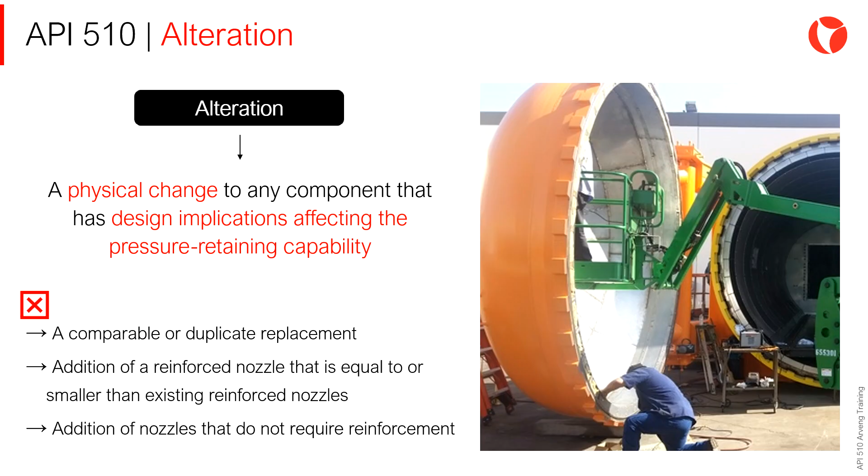What should not be considered alterations? Any comparable or duplicate replacement. For example, if I replace a 4-inch nozzle on a vessel with another identical 4-inch nozzle because it needs to be replaced, this is not considered an alteration. Also, the addition of any reinforced nozzle equal to or smaller than existing reinforced nozzles, and the addition of nozzles that do not require reinforcement.

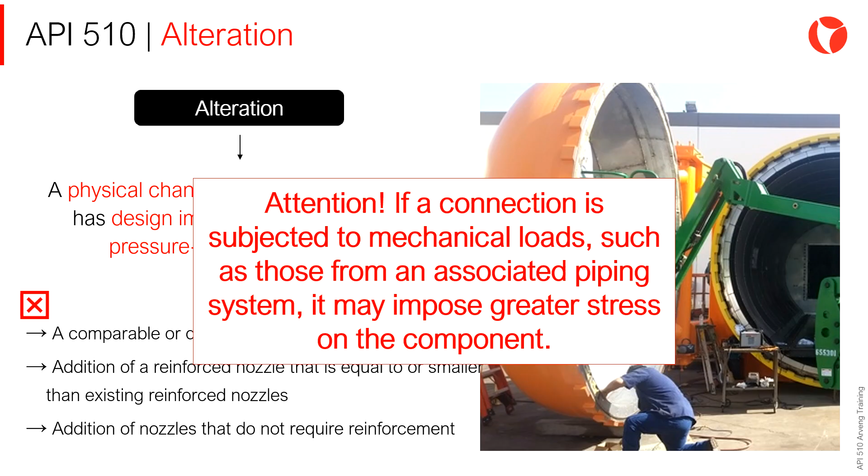It's very important to take mechanical loads into account. If a connection has mechanical loads applied, such as those from an associated piping system, it may impose greater stress. We know that if we connect a pipe to the nozzle of the equipment, that pipe will tend to move due to thermal effects. When the pipe shifts, it generates a series of moments and loads on the nozzle that induce stresses in the vessel, which can complicate alterations by changing the original conditions.

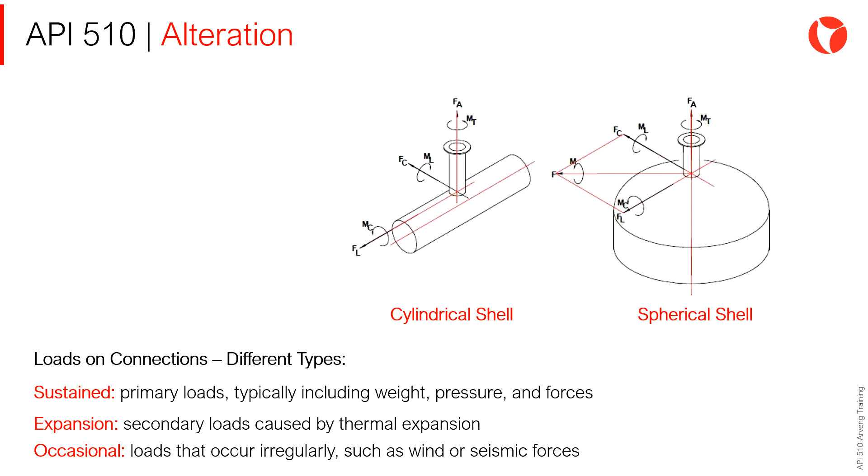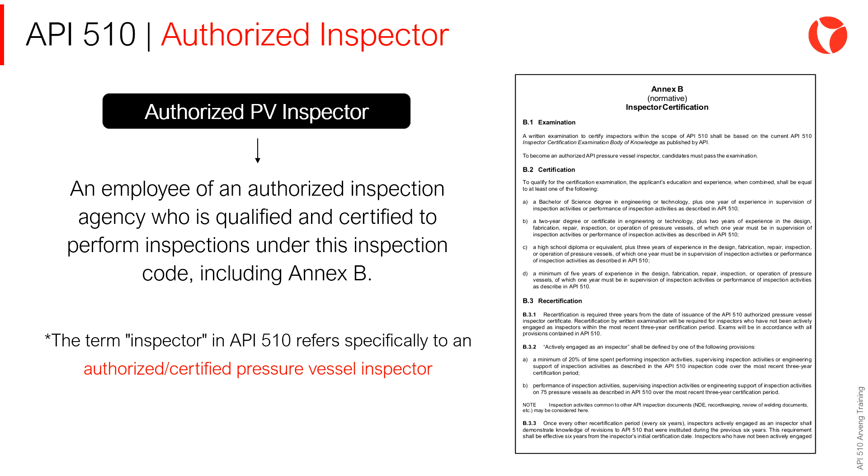So now the question arises: considering that API 510 is not mandatory, is a certified API 510 inspector required in an industrial plant? If the equipment is ASME stamped and the ASME certification is to be maintained, then an authorized inspector must be present.

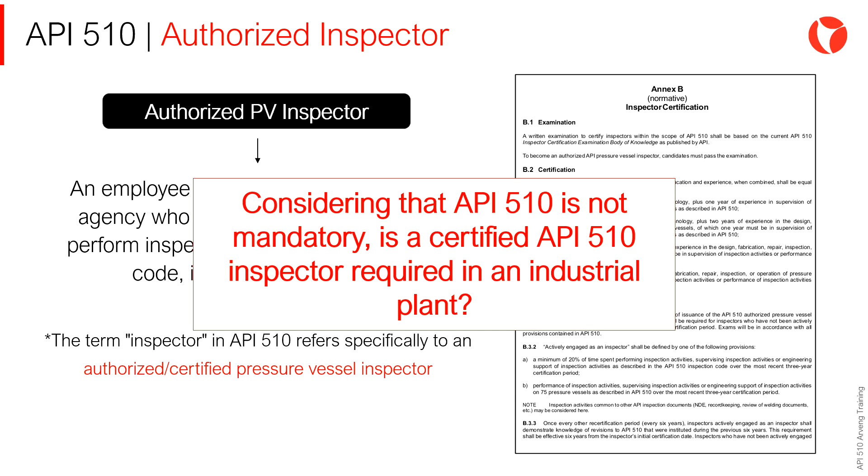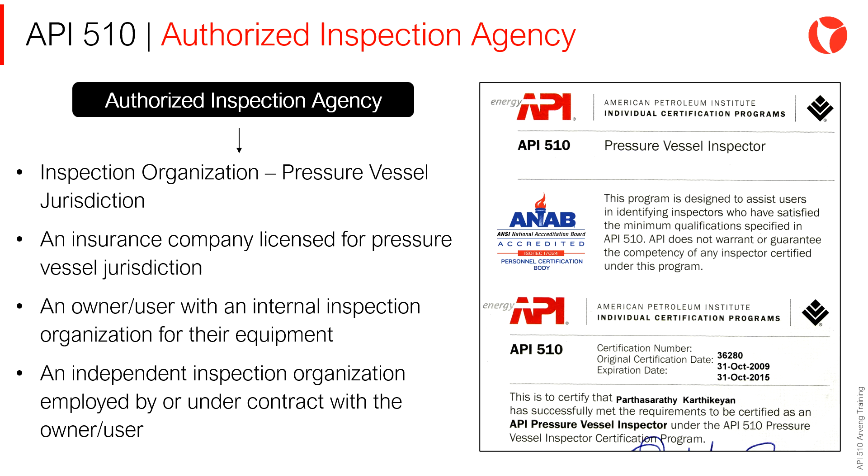Authorized Inspection Agency. This agency can take different forms. It may be an inspection organization within the jurisdiction of pressure vessels, an insurance company licensed to underwrite insurance for pressure vessels, the owner or user who maintains an inspection organization for activities related solely to their own equipment, or even independent inspectors employed by or under contract with the owner user.

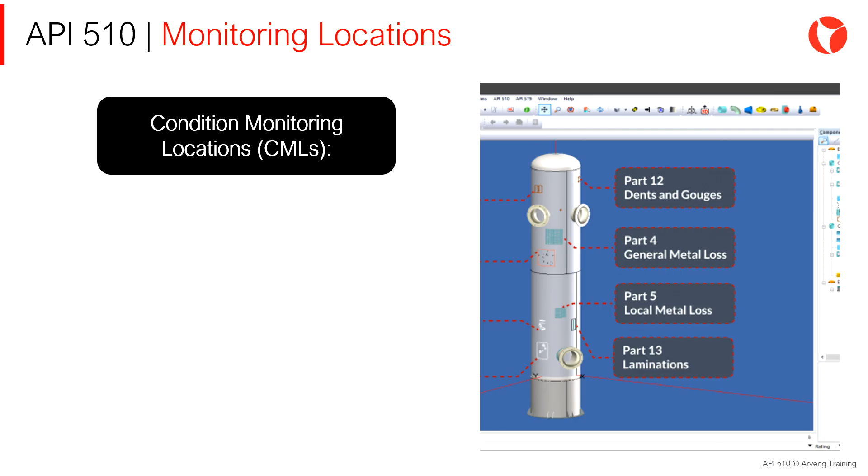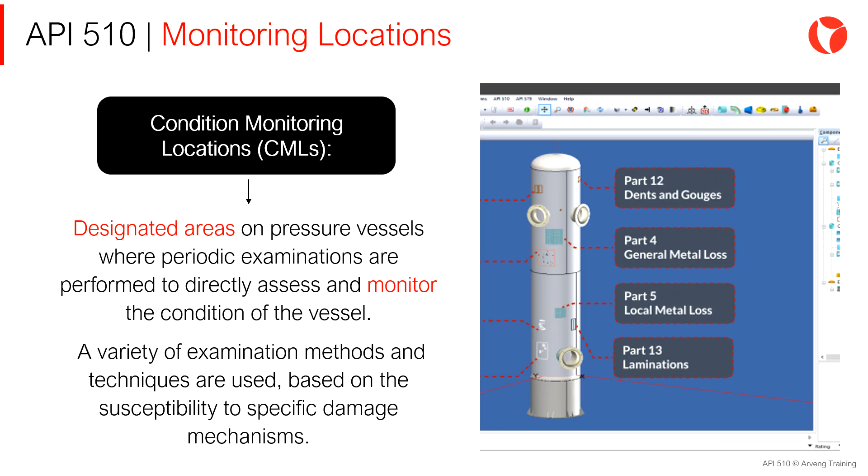Condition Monitoring Locations, or CMLs. These are designated areas on pressure vessels where periodic examinations are performed to directly assess and monitor the condition of the vessel, such as corrosion or cracking, using a variety of examination methods and techniques based on susceptibility to damage mechanisms. These points must be accessible and easy to inspect regularly.

Corrosion rate: the rate of metal loss over time. This loss may be due to erosion, corrosion, and/or chemical reactions with the environment. It can occur either internally or externally.

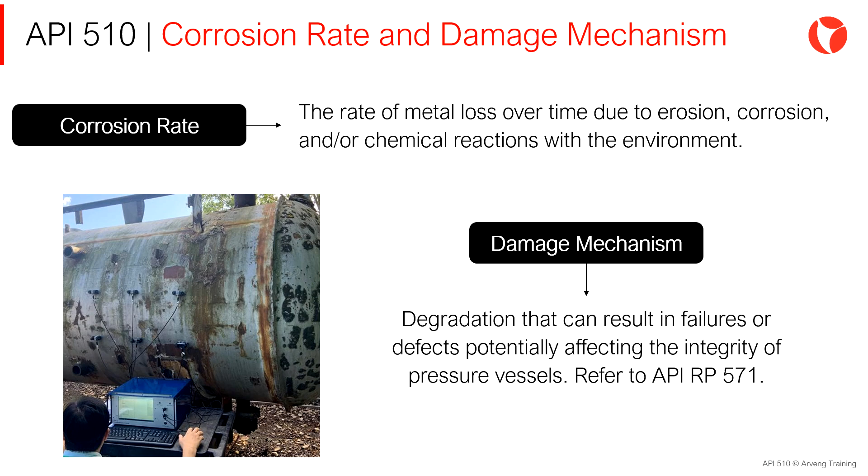Damage mechanism: any type of deterioration that may result in failures or defects capable of affecting the integrity of pressure vessels. For example, corrosion, cracking, erosion, denting, and other mechanical impacts. These damage mechanisms are covered in API RP 571.

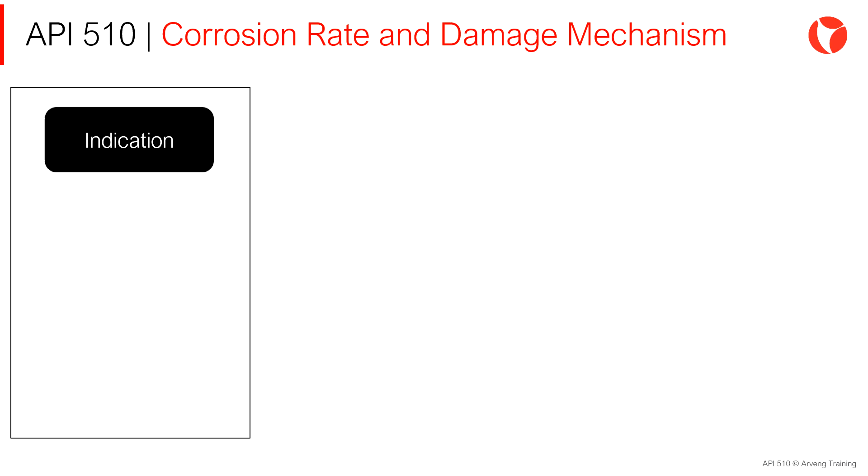When detecting damage mechanisms, the first thing we'll typically find is not a failure itself, but an indication: a response or evidence resulting from the application of a non-destructive test, which may or may not be relevant or represent defects or failures upon further analysis.

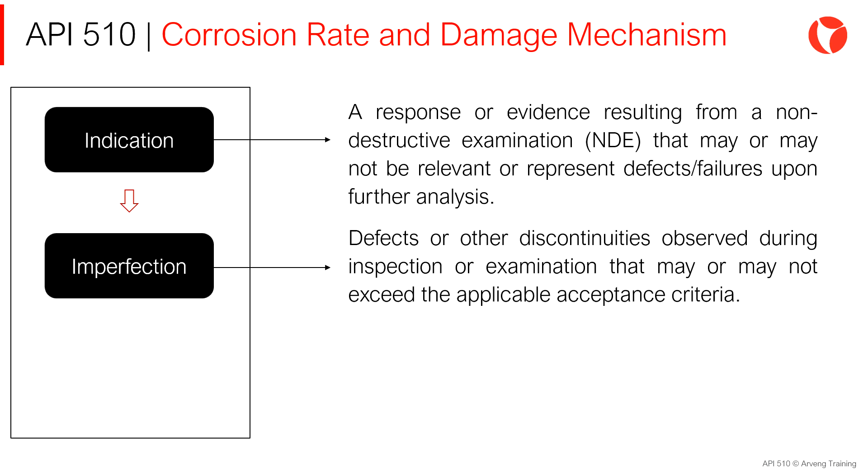That indication may then become an imperfection, which refers to defects or other discontinuities observed during inspection or examination that may or may not exceed the applicable acceptance criteria. And that imperfection may or may not lead to a defect, which is essentially a discontinuity or combination of discontinuities that, by their nature or cumulative effect, cause a part or product to fail to meet the applicable minimum acceptance standards or specifications. For example, the total length of a crack.

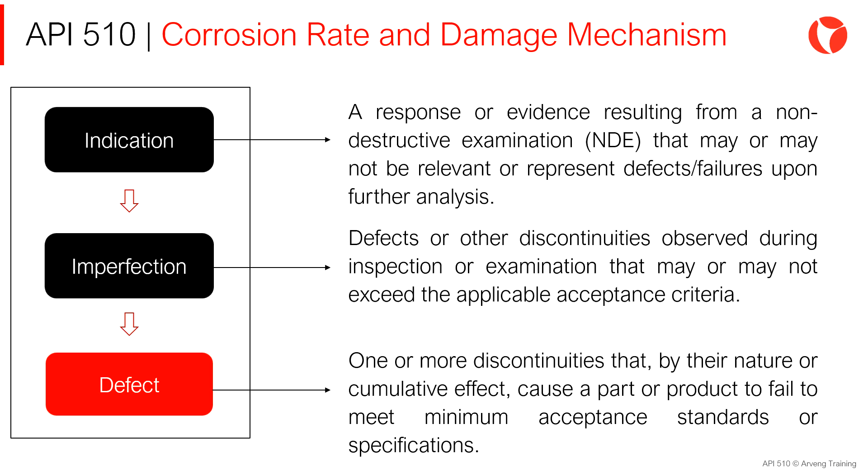So now let's define something that's very important to understand clearly, the maximum allowable working pressure, or MAWP for short. MAWP is the maximum gauge pressure permitted at the top of a pressure vessel in its operating position and at a designated temperature. So now we ask, how is this operating pressure determined?

Is it the same as the design pressure? The answer is no. MAWP is not the design pressure. It's based on calculations that use the minimum thickness for all critical elements of the vessel, excluding the thickness designated for corrosion, and adjusted for applicable static pressure and other non-pressure loads.

The design pressure is the pressure used in the original design to calculate the required thickness of the equipment. However, that thickness is often increased during manufacturing, for example, due to purchasing plates with standard dimensions. So the actual maximum pressure for the equipment may be higher than the design pressure.

It's important to note that MAWP by default will always be greater than the design pressure, except when it's intentionally defined to be the same, although this is not common practice.

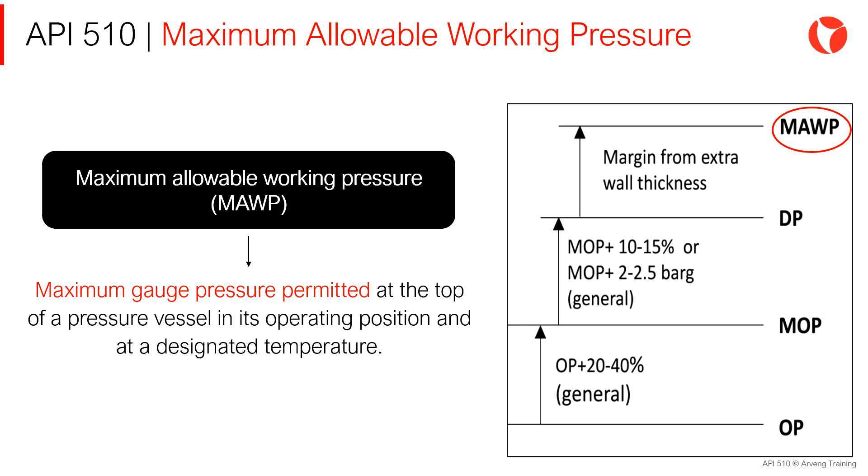Above the design pressure, due to margin from the extra thickness we mentioned earlier, we get MAWP. It's important to keep in mind that the extra thickness for corrosion does not contribute to the structural strength of the equipment under internal pressure, so all the calculations mentioned are performed without considering that extra thickness.

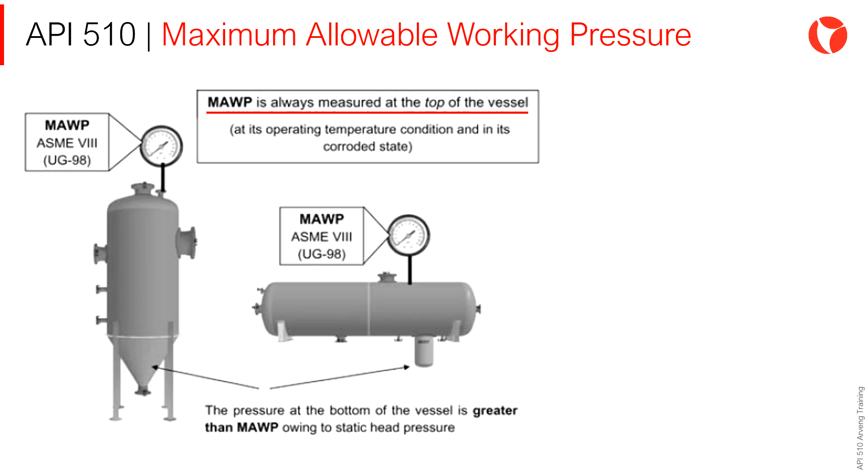It's important to understand that the MAWP is always measured at the top of the equipment. This is done to avoid accounting for the hydrostatic pressure caused by the liquid column inside the equipment. If we want to determine the maximum pressure the equipment can withstand without overstressing it, we must consider the lowest value, which occurs at the top of the equipment.

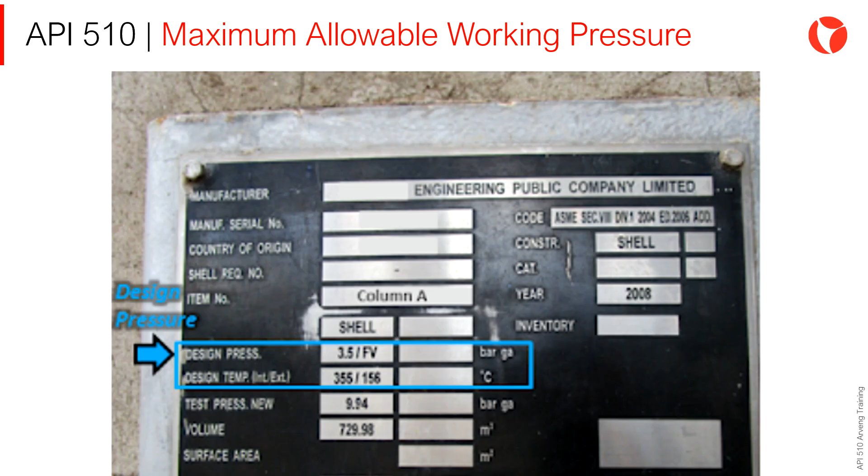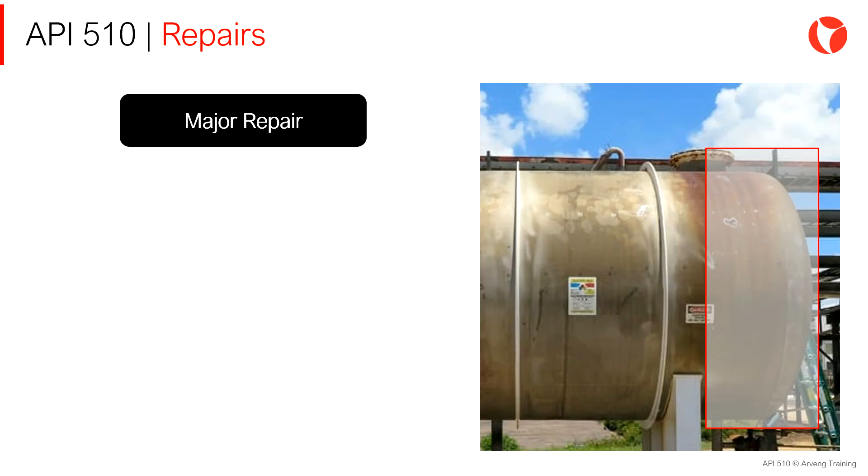Another important definition to keep in mind is what's considered a major repair. It's crucial to understand this clearly because major repairs are associated with a hydrostatic test afterwards. Minor repairs, on the other hand, do not require this test. A major repair is defined as any work that is not an alteration and that removes or replaces a significant part of the pressure boundary, excluding nozzles. For example, when replacing a head.

If corroded areas are found on the head of a pressure vessel, a decision may be made to cut circumferentially, remove the head, and install a new one. In that case, we're dealing with a major repair, which will clearly require a new hydrostatic test of the entire vessel. There are also minor repairs, such as repairing or replacing a portion of the shell if necessary, or minor weld deposits to compensate for thickness loss due to corrosion, as an example. So it's important to understand the difference between major and minor repairs.

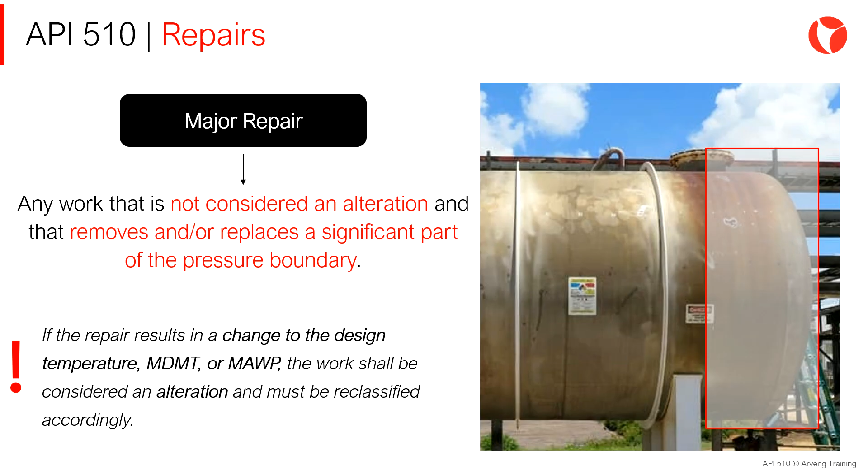If the repair work results in a change to the design temperature, the minimum design metal temperature, or the maximum allowable working pressure, the work will be considered an alteration. This is because the vessel's ability to withstand pressure is evidently affected, and in such cases, a re-rating of the equipment must be carried out.

Temporary repairs are those performed on pressure vessels to restore sufficient integrity to allow safe operation until permanent repairs can be made. And here we enter a bit of a gray area, because this will depend on common sense and the specifics of each case.

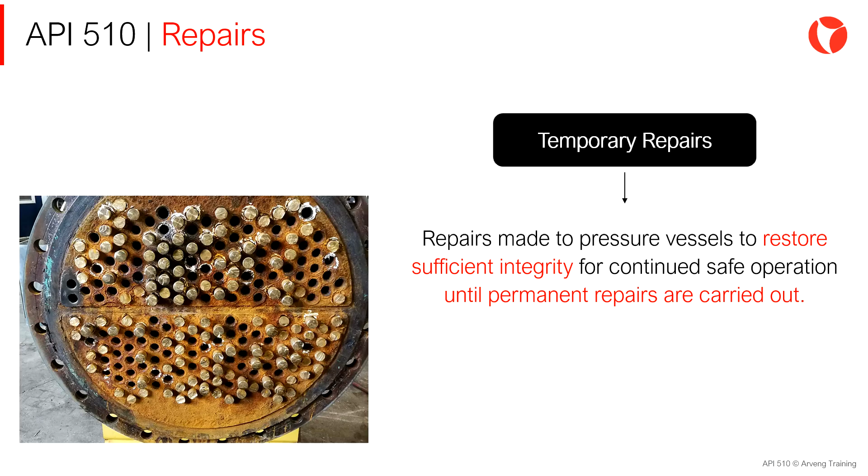First, we should know when we'll be able to carry out a permanent repair and take the equipment out of service. This is usually during a plant shutdown. Then we should also perform a brief sensitivity analysis when planning a temporary repair, taking into account the criticality of the system being repaired. That's why the code in this case is quite ambiguous and does not specify time limits.

Another important term to understand is required thickness. This thickness is calculated according to the design code. In this case, we're referring to ASME Section 8 code, and Division 1 provides calculation thicknesses for different components. On the screen, we see the thickness calculation for a cylinder, which is the most common and straightforward case. Naturally, the design code establishes all the methodologies and calculation rules for the various components.

So, the required thickness is the minimum thickness, excluding any corrosion allowance and any tolerance, that each element of our equipment needs in order to withstand the loads acting on the vessel. These loads include internal and external pressure, seismic loads, loads on connections, and thermal loads.

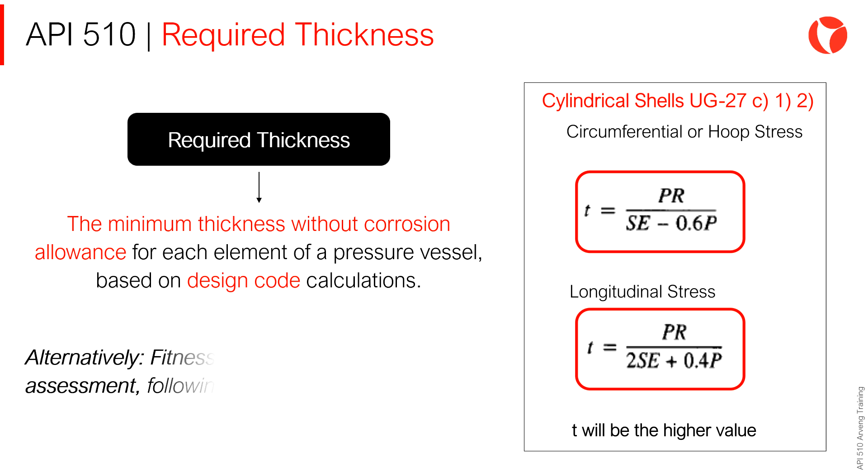Alternatively, the required thickness can be reevaluated and reviewed using fitness for service analysis in accordance with API 579-1.

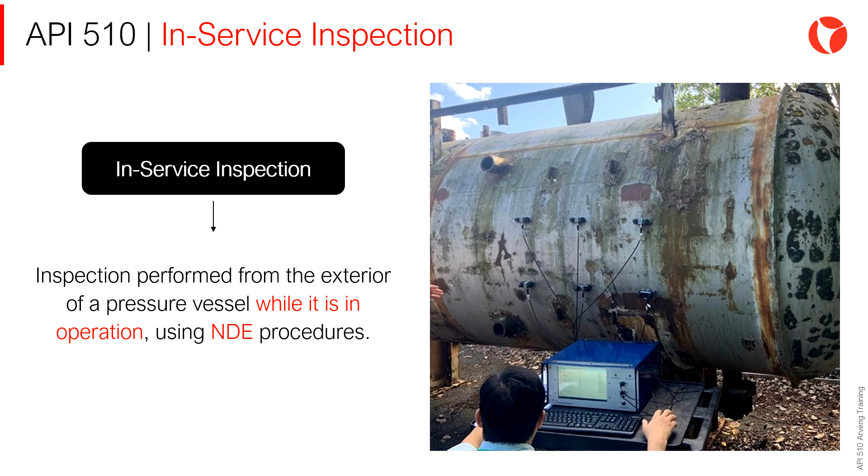An in-service inspection is one that's performed from the outside of a pressure vessel while it's in operation using non-destructive testing methods. These inspections can be carried out under normal operating pressure and temperature conditions. If a thickness measurement is to be taken and there is a defined risk to the person performing the measurement, depending on the criticality of the equipment, the operating conditions can, if necessary and feasible from an operational standpoint, be adjusted.

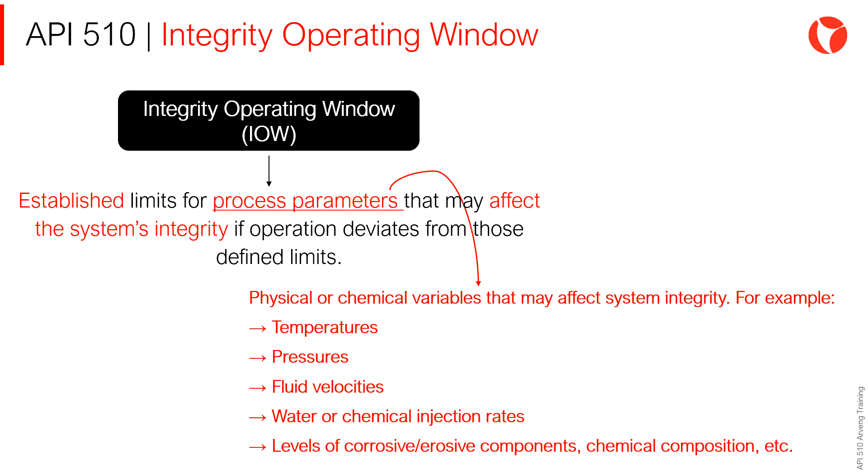The integrity operating window is basically the established limits for the different operational parameters of the process that can affect the integrity of the system in case of deviations. These parameters can be physical or chemical variables that may affect the integrity of the equipment. Examples include temperatures, pressures, fluid velocities, water or chemical injection rates, and levels of corrosive or erosive components, chemical composition, and so on. In other words, the equipment will operate within a zone known as the integrity operating window, and within that window, there will be defined minimum and maximum parameters.

Above those parameters, we'll have a troubleshooting zone. Then there will be a buffer zone that acts as a safety margin. And beyond that zone, operating the vessel at those values is considered unacceptable.

A program must be implemented and maintained to establish and monitor operating windows. The window is implemented to prevent exceeding process parameters that impact integrity. Deviations and trend changes within the limits established in the window must alert inspection and engineering personnel.

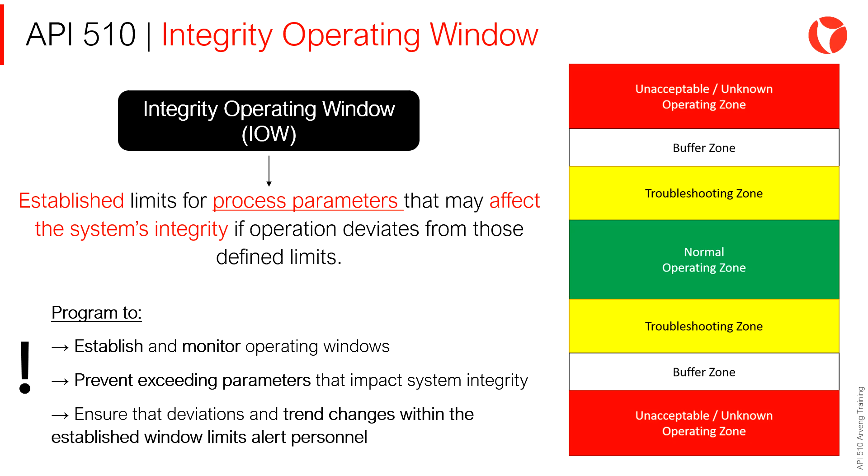All these terms and definitions can be found in Part 3 of API 510, and they'll serve to help us better understand and interpret the code.